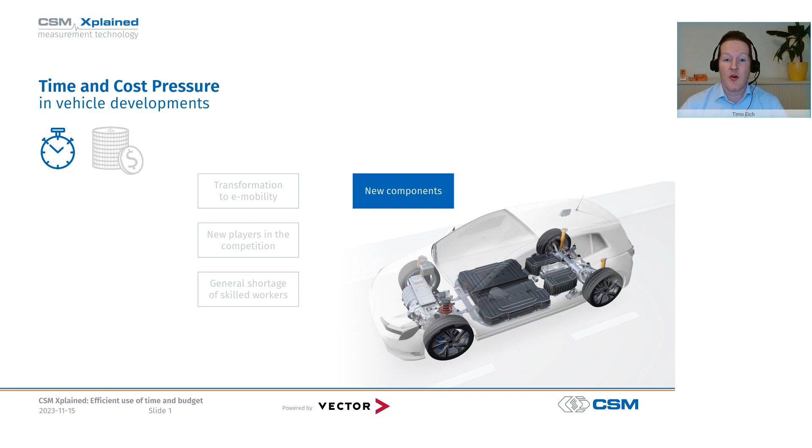Now, in the field of measurement technology, we are dealing with a whole range of relatively new components in electromobility for which not that much experience is there. And for some of these components, for example fuel cells and batteries, new technology knowledge is also required, for example from the field of chemistry, for which the relevant people in charge have to be trained first.

Another problem with new components and systems is that most of the simulations for those are still insufficient. Why is that? Because any simulation is only as good as the models on which they rely. However, for many new applications, there's simply a lack of real data from practice, and models based on purely theoretical considerations often do not withstand reality.

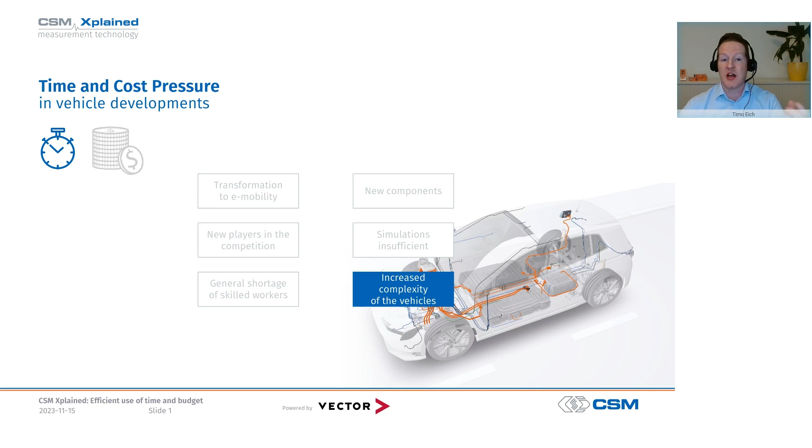This means that driving tests must be carried out already before the simulation starts in order to get valid data for the simulation models. In addition, the complexity of the vehicles has increased significantly, which naturally also leads to a much higher testing effort.

And what's more, oftentimes new measurement technology is required for testing new drive concepts, for example analyzers for electrical power, and in general, the need to safely acquire measured values of various sensor types at high voltage potential. This means new investments in new technology, measurement technology, hardware and software.

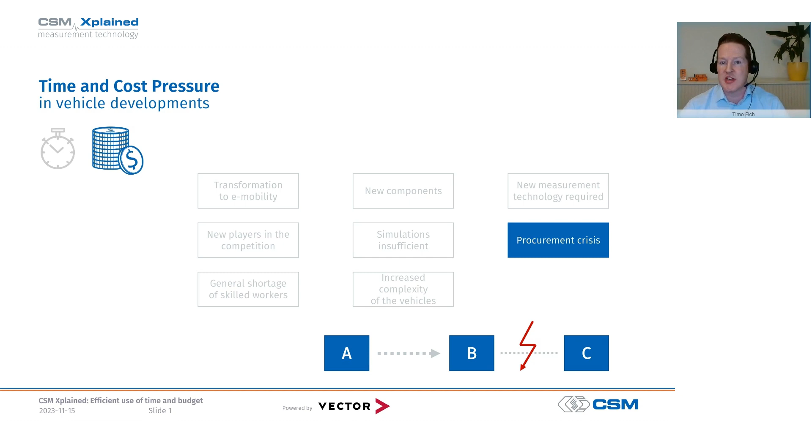And recently, we have also experienced direct cost drivers such as the procurement crisis, which has caused a massive rise of cost and delivery times, for example of electronic components. And finally, personnel and energy costs are rising everywhere, also due to the current inflation.

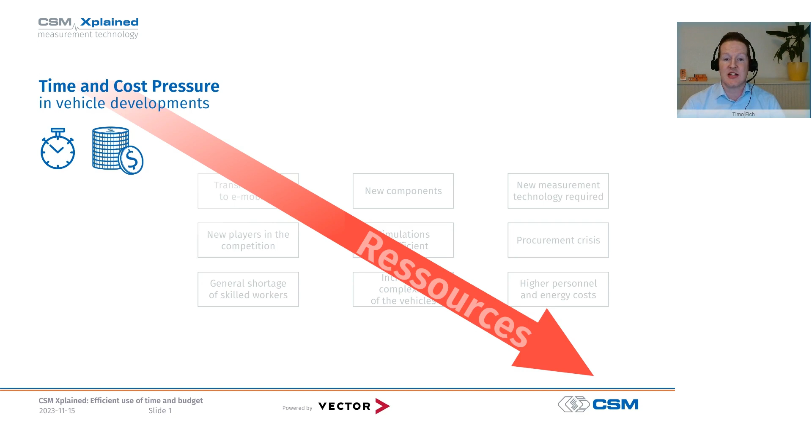Well, let's summarize the situation. Our resources, namely time and money, continue to decrease even though the complexity of vehicles and their testing continues to increase. So what does that mean? We need to be more efficient with our resources. We need to use the time available to us more efficiently, namely get more work done in the same amount of time. And we need to invest wisely so that our budget is used as efficiently as possible.

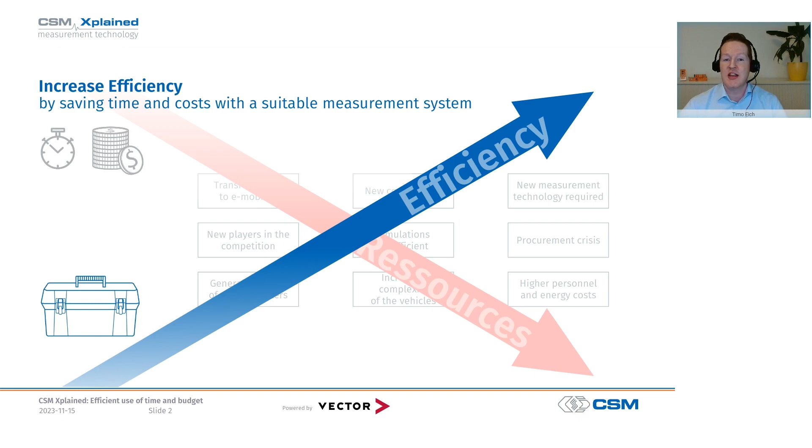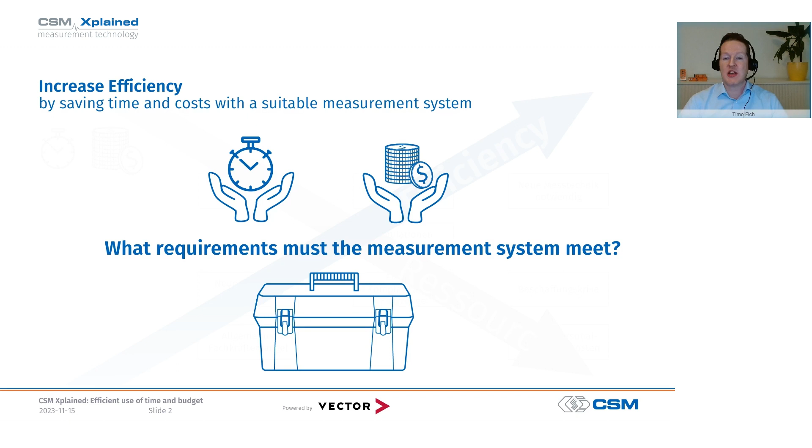And specifically in the context of measurement technology and testing, this means that we need measurement technology that is highly efficient, that makes work easier and is highly available, and measurement technology that is reliable and safe.

We will now develop together what this can look like using the usual measurement data processing procedure. We will briefly go through all the process steps along the way, reveal where time and cost traps may be lurking, and identify potential for optimization.

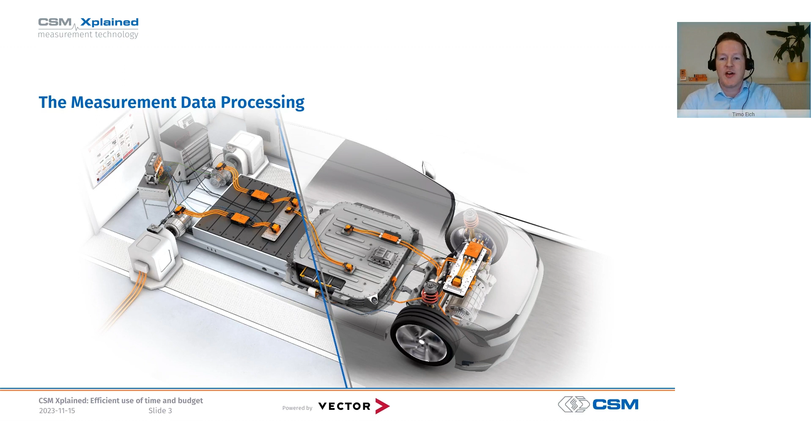So let's start by defining the scope of the investigation. This is where we can already set the course so effectively that we can benefit massively in the further process. If we decide now that not only one specific test will take place in our test vehicle, but that our test vehicle will be used for several tests at the same time, then we can save a lot of time by working in parallel.

Of course, we will need more measurement technology for that in our vehicle, and ideally we use a versatile measurement system that can carry out a wide range of tests simultaneously.

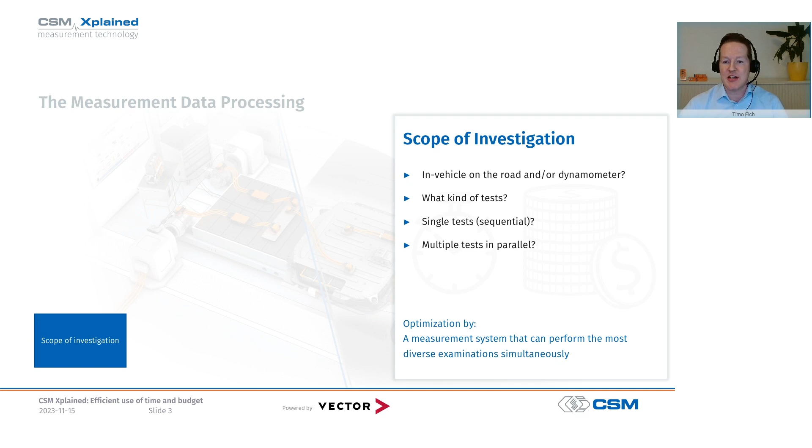Once we have determined the scope of the investigations, we must define which measured variables we want to record, and also determine the measuring points, meaning the locations and components at which measurements are to be taken. And we have to select suitable measuring principles and sensors.

And if we want to measure with many different sensors, it is very helpful if our measurement system offers the option of reading in a wide variety of sensor types, and that under harsh conditions if needed.

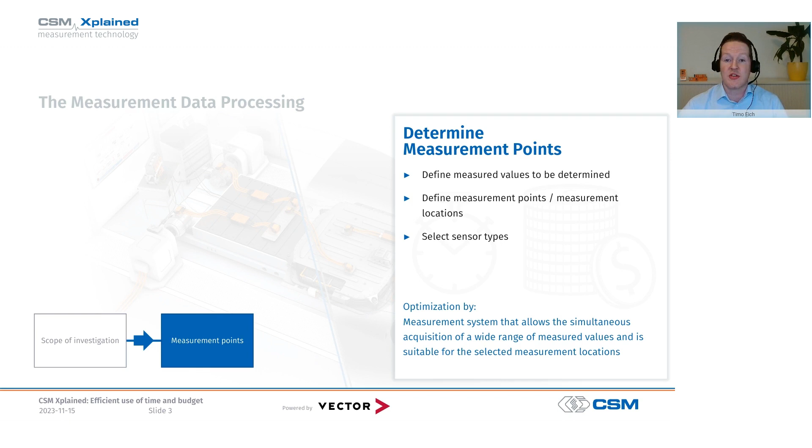Once the measuring points and sensors have been determined, we can then think about the choice of the measurement devices and modules. But what if we are lacking measurement equipment for new applications, let's say electrical power measurement? Then we have to think about it at the latest.

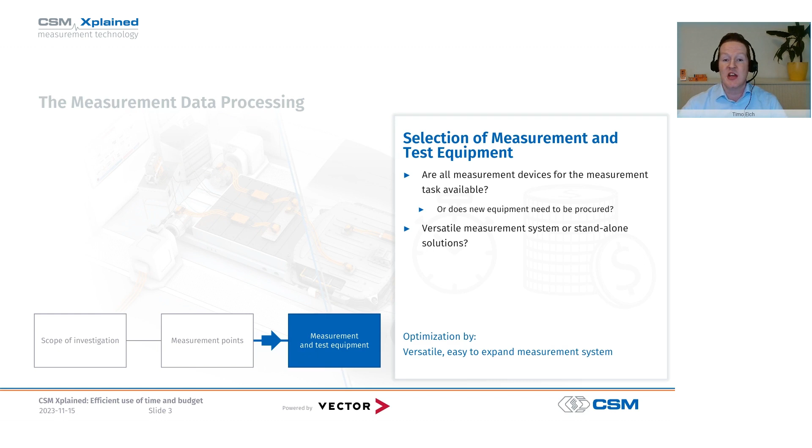Do we now buy a standalone solution, meaning something very special just for this measurement task? Or do we perhaps opt for a versatile, easily expandable overall solution that allows us to react flexibly to new requirements time and time again?

Because there's one important point, especially when it comes to time and money, that we must not underestimate, namely the effort involved in installing and configuring the measurement systems.

So how easy is it for us to have the hardware properly installed on the test bench, or even more difficult, in the vehicle? Ask someone in your company who's entrusted with the installation of measurement technology in the vehicle on a daily basis, if it's not you yourself, how much time consumption and stress can be avoided with good installation aids.

The user friendliness and simplicity of the software are also huge criteria for our customers. So is the software incredibly complex, and do we perhaps need new instructions or training after a 2-month break? Or is the software simple, self-explanatory, and offers configuration aids such as TEDS support, signal and sensor databases? A very important point in this consideration.

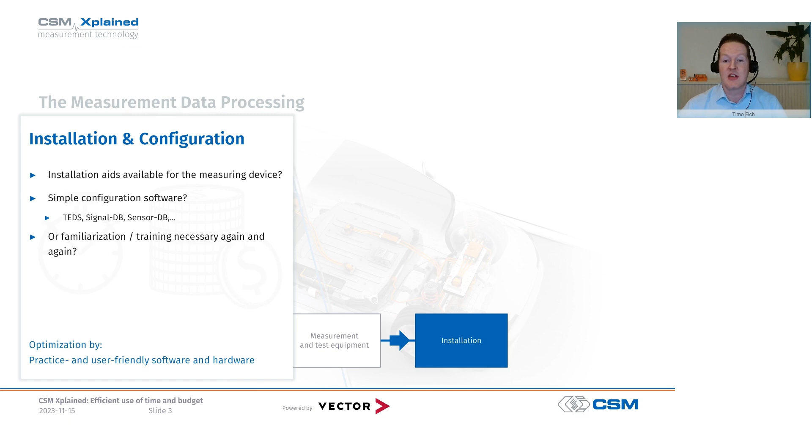Next step is the calibration of the measuring devices. Many of our customers have to calibrate their measuring devices before every test campaign. And it helps a lot if our measuring devices do not have to be sent to the manufacturer or a calibration service provider every time, but if we can at least partially calibrate them on site.

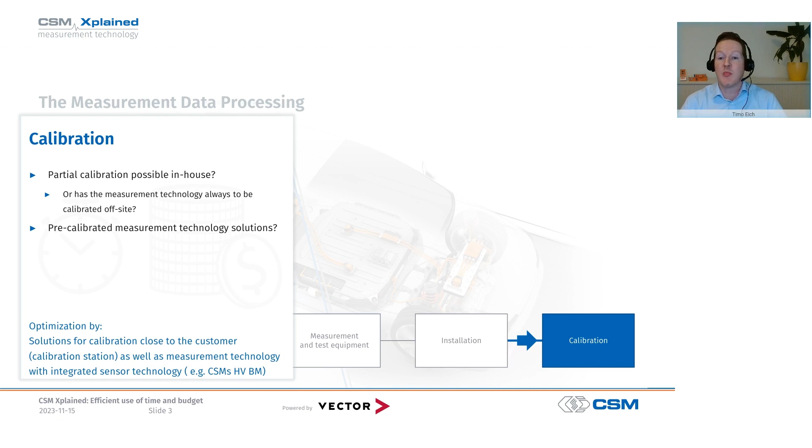Another point, for example, in electrical power measurement is, do the current transformers have to be laboriously calibrated on the test bench for days? Or can we save a lot of time with an intelligent concept such as the HV breakout module from CSM with integrated current sensors? Because here the calibration is already carried out in the factory and the measurement module is directly ready for immediate use.

When carrying out the tests, it of course depends very much on how we have defined the scope of the tests in the first step. But even if we have equipped our test vehicle for several tests, the question is still, do we have to carry out the tests one after another? Or can we actually carry out various tests really at the same time?

Because the latter not only saves us time, but also allows us to directly link the test results of several tests, for example acoustic data and electrical power data. And in this way, we can anticipate some of the offline data analysis and perhaps even react to results already during the tests.

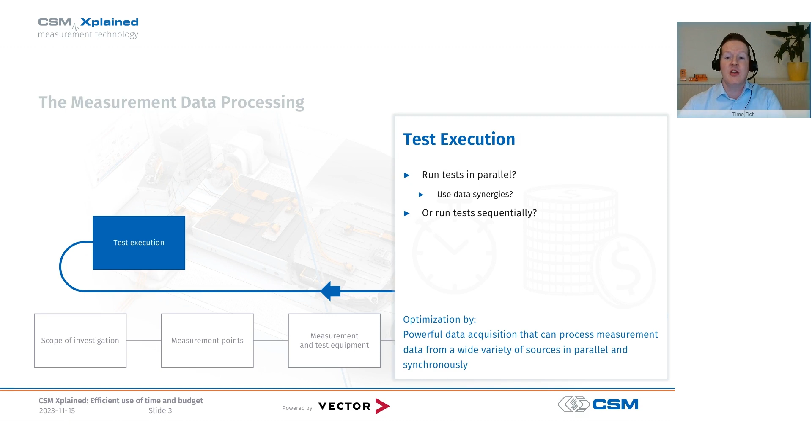Another very interesting way to increase efficiency is data pre-processing, meaning real-time calculations. Here, our suitable measuring system calculates meaningful parameters from raw data in real time during the data acquisition. For example, we could have our measuring system calculate the active, reactive, and apparent power on board from the raw current and voltage signals.

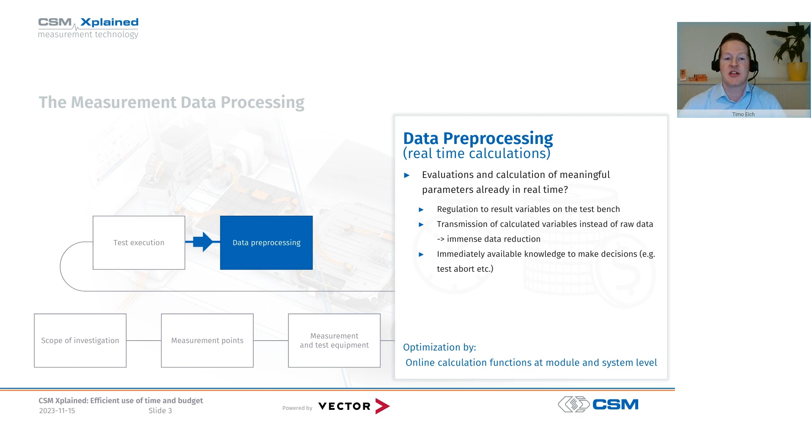With these calculated parameters, we then have completely new possibilities. For example, we can react directly to these calculated measured variables, or even use them as controller inputs on the test bench, or carry out a massive data reduction through the exclusive transmission of calculated values.

Provided we have decided to record several signal sources simultaneously, it is absolutely crucial that the measurement data is precisely synchronized with each other. However, it is often problematic, especially with standalone solutions that work each on their own, if the various data files and time bases then have to be laboriously synchronized manually. In practice, we can really lose a lot of time here.

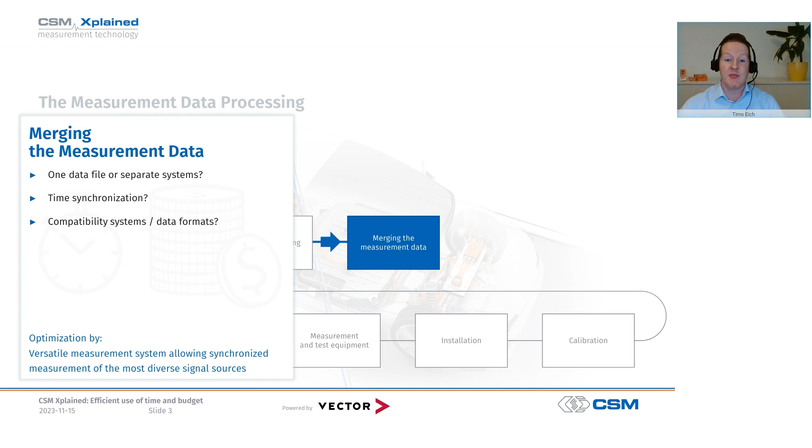But if our measurement system allows us to write the measurement data from all signal sources synchronized in a single data file with one time base, then of course the data is available for analysis immediately after the measurement.

Another way to increase efficiency is by means of intelligent data storage and, in driving tests, remote data transmission. When storing data, triggers can help us to only record what is relevant to us. Data compression can help save storage space, and if the data is saved in the correct target format straight away, there are no annoying waiting times for converting file formats afterwards.

And in road tests, remote data transmission to a server is a particularly good way of starting offline analysis in parallel while the road test is still running. To do this, we need a data acquisition system that allows smart data storage management and also has wireless communication tools on board for the road tests.

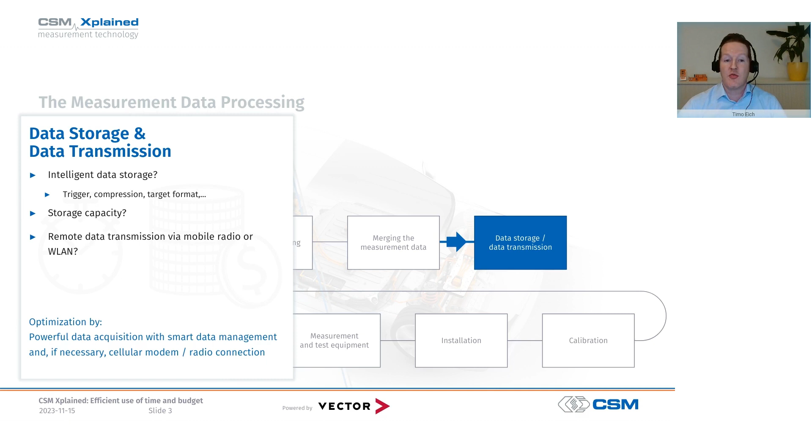And at some point, the data is transferred and saved, and then it's finally time for offline analysis. And here some exciting questions arise. Is the data from different signal sources already synchronized in time? And are all the data files in the same file format?

Of course, it's extremely helpful if the evaluation can be automated via scripts and if entire test series can be analyzed automatically in one go. Another aspect is the combined analysis of data from different simultaneous tests, such as the aforementioned correlation of acoustic data and power data. This requires powerful offline analysis tools with open interfaces and modular expandability.

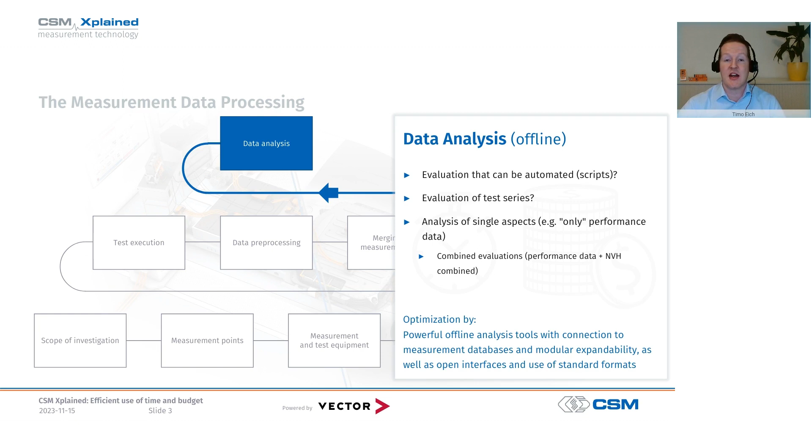And we need still something more for conveniently analyzing entire test series, namely intelligent data storage and smart measurement data management. The question here is, do we still store data in the traditional way in some file folders, or are we perhaps already using a measurement database with cloud connection and a wide range of analysis options? Here again, we can save huge amounts of time, especially with large test series.

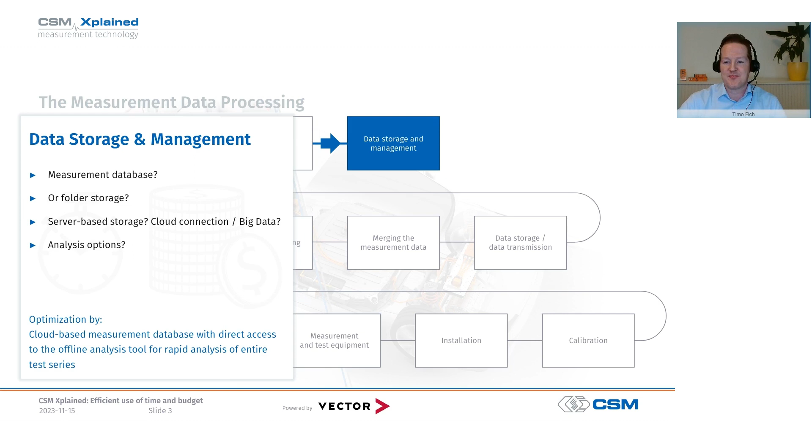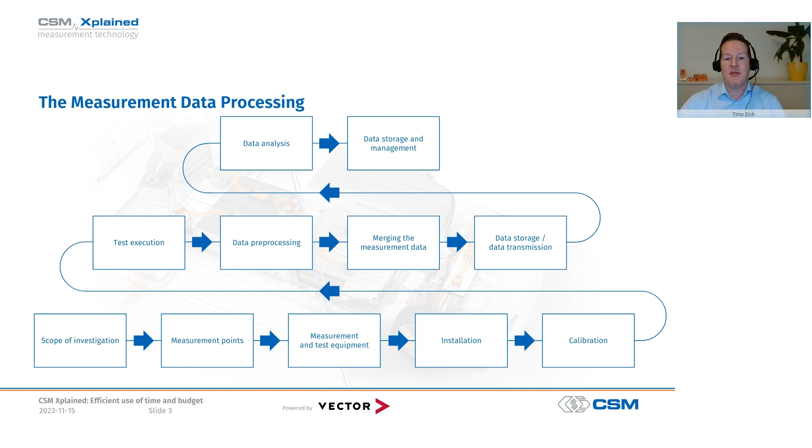Here is the entire measurement data processing procedure at a glance, and we have just talked a lot about the basic optimization potential of the individual process steps. The question that now arises is, how do we implement this potential in concrete terms? To answer that question, I would now like to introduce you to 4 key principles that we believe are crucial for significantly increasing and maximizing the efficiency of measurement data acquisition.

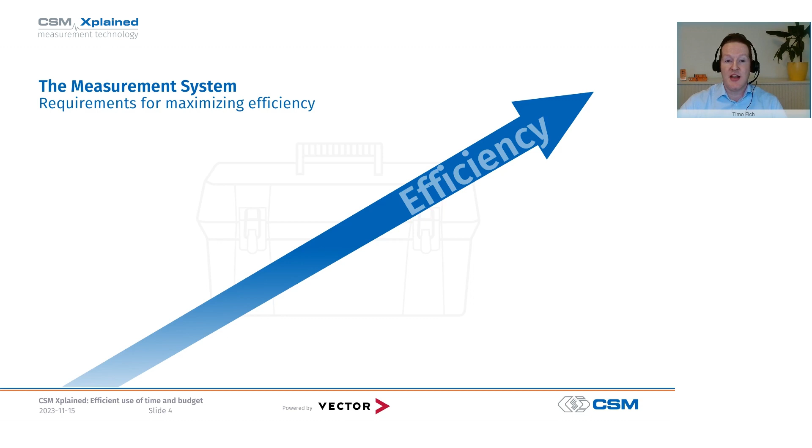And these 4 principles are: number 1, connectivity. By connectivity, we mean the use of powerful bus systems, interfaces, synchronization mechanisms, and file formats for easy connection of distributed measurement technology and its measurement data.

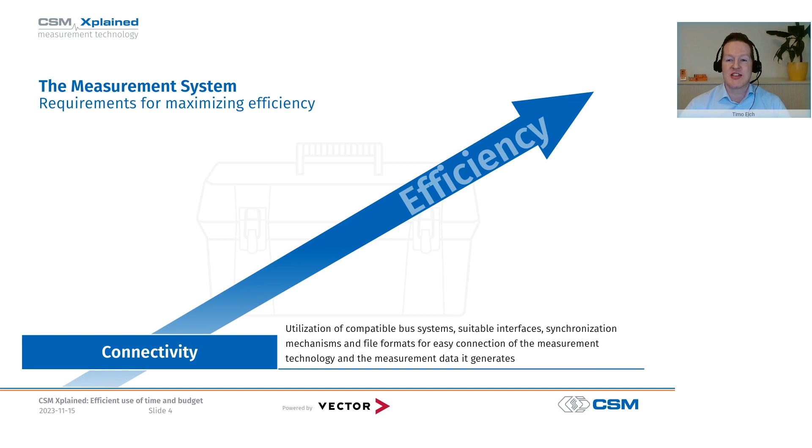And that brings us straight to the second principle, which is modularity. Modularity allows us to constantly reassemble a flexible measuring system consisting of specialized individual modules in such a way that it is precisely tailored to current requirements.

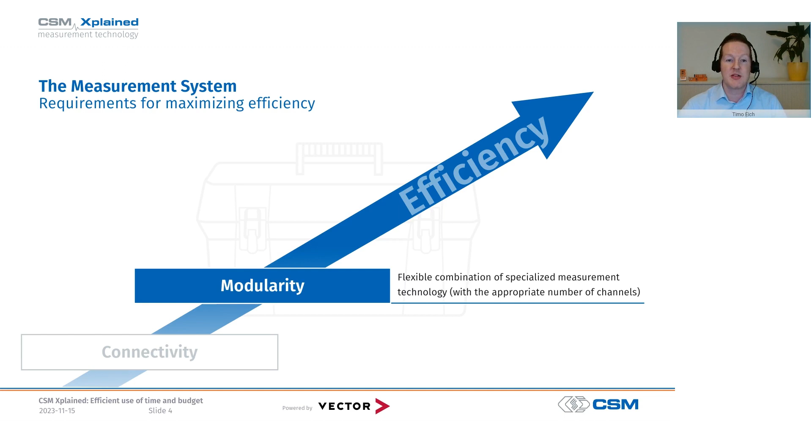And if we have powerful measurement modules and bus systems at our disposal, then this results in the third principle, and the third principle is scalability.

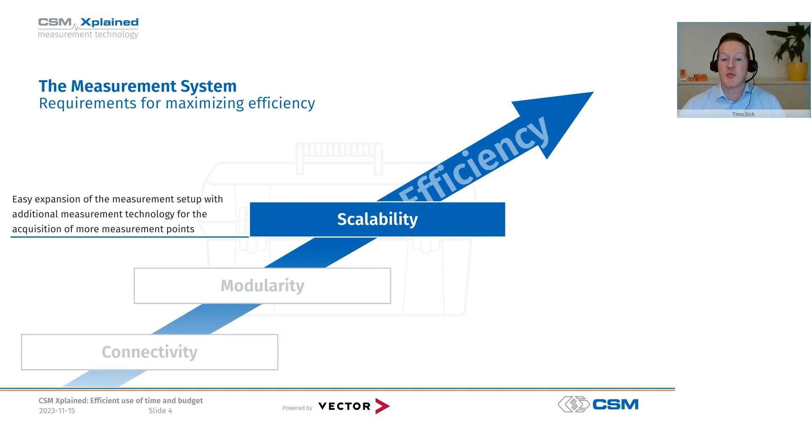Scalability means we can implement very small measurement setups and manage huge connected measurement setups with the same modular measurement technology. And if we combine our first three principles, it brings us to principle number four: versatility. By versatility, we simply mean the almost unlimited possibilities of acquiring data from a wide variety of signal sources and performing a wide range of analysis with a single system.

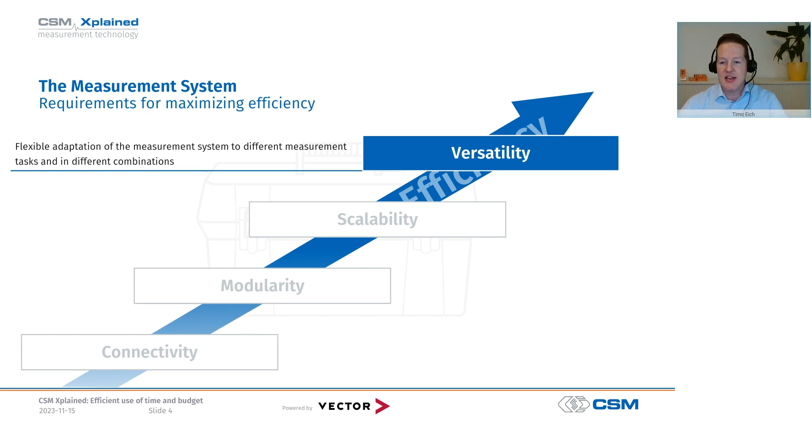A measurement system that combines these four principles, connectivity, modularity, scalability, and versatility, is the Vector CSM e-mobility measurement system. This system consists of a wide variety of modules that can be flexibly combined to meet changing or simultaneous requirements, from analog measurement hardware, bus data interfaces, and data loggers to measurement data acquisition software and measurement data analysis and data management tools. We won't look at all of these blocks today, but we will now explore the possible applications of the system using the four basic principles just presented and some practical examples.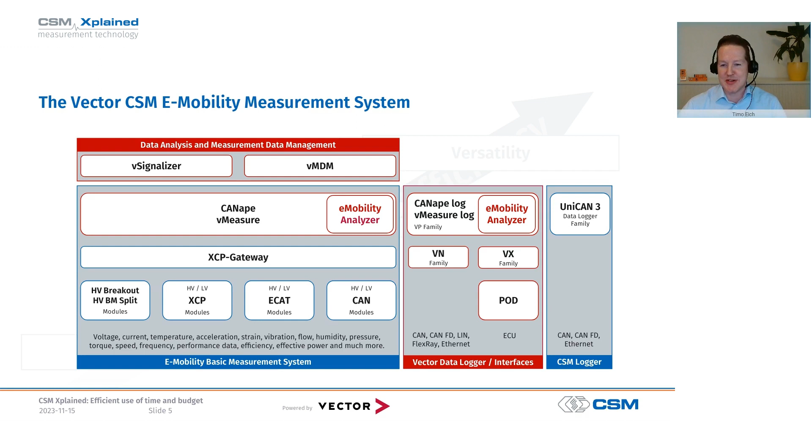Let's start with our first principle, connectivity. For us, connectivity means the use of compatible bus systems, interfaces, synchronization mechanisms, and file formats to connect different software and hardware modules together to form a system.

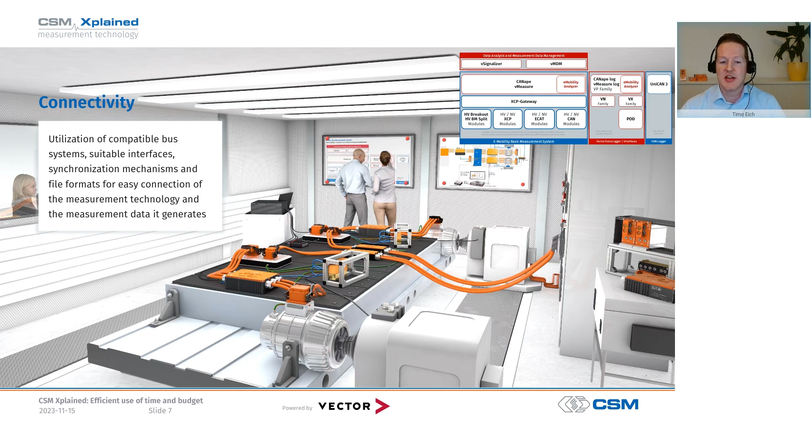Here's a small example: a power measurement on the electric drivetrain. In fact, we do even more here, because we measure the DC power between the battery and the inverter, and the mechanical output power on the electric motor via speed and torque, and determine the overall efficiency of the electric drivetrain, plus recording some temperatures on components that operate at high voltage level, such as the inverter or the electric motor.

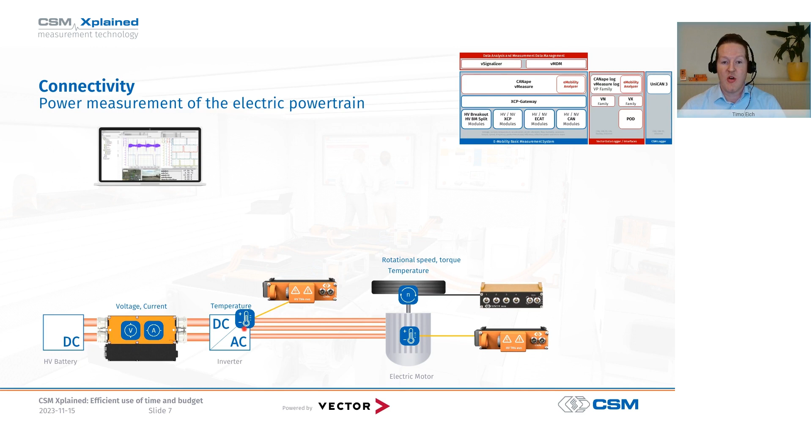If we take a look at how the measurement modules are connected with each other, we can see that various bus systems are in use here, which cover different requirements for the corresponding measurements. We can see devices connected via CAN bus here in blue, devices connected via EtherCAT here in green, and also an XCP on Ethernet connection here in black. Let's take a look at these three bus systems.

XCP on Ethernet is a high-speed interface that is widely used in the automotive world, especially for in-vehicle applications. At CSM, we use this very fast bus system primarily because it supports a standardized protocol for synchronizing many distributed bus participants, the so-called PTP, Precision Time Protocol. This protocol allows us to synchronize fast signal sources with microsecond precision.

The second bus system is EtherCAT, also a standard that is widely used in automation, particularly on test benches. At CSM, we use EtherCAT as a fast backbone for hundreds of measurement channels and for connecting our modules to test benches. EtherCAT also has a built-in synchronization mechanism, the so-called distributed clock. And for all slower variables, we use the good old CAN bus, which does not offer these high bandwidths, but it's very easy to use and it's incredibly widespread.

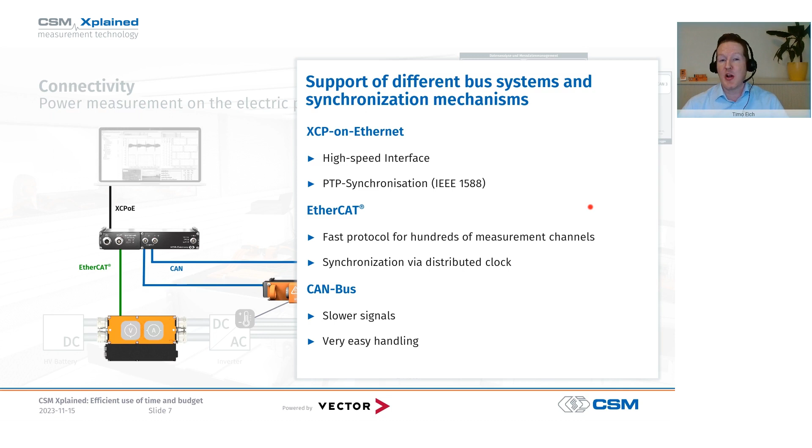With these three bus systems, we are now able to set up distributed, very fast, and synchronous measurement networks, which is what we mean by the principle of connectivity.

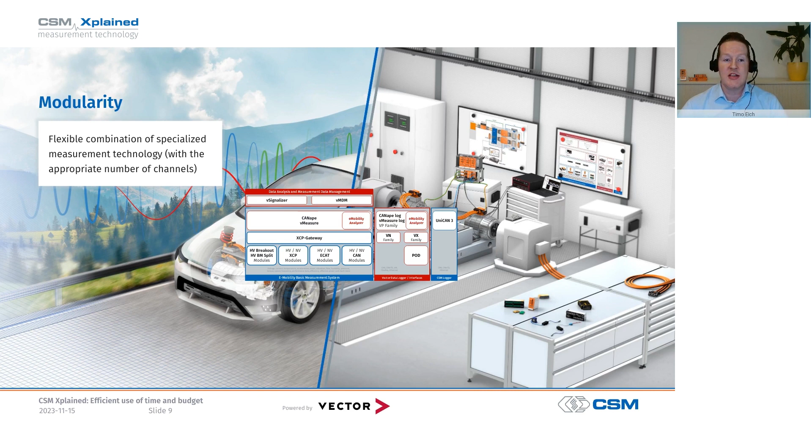That directly leads us to the second principle, modularity. Modularity means the flexible combination of specialized measurement modules in order to build systems that are precisely tailored to the application. Our goal is to cover a wide range of applications and scenarios.

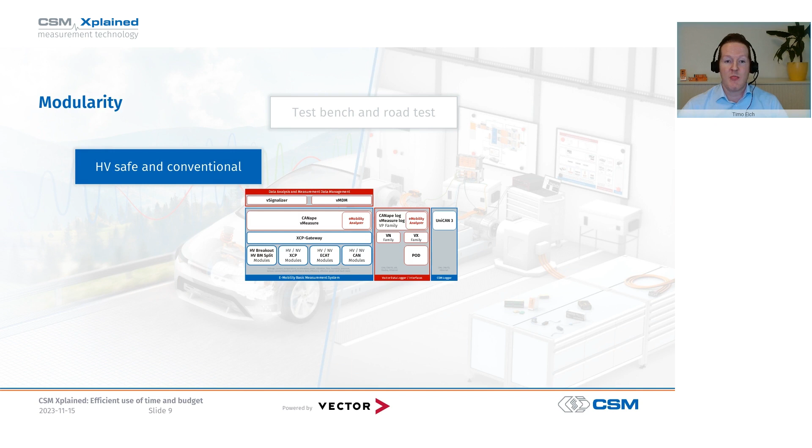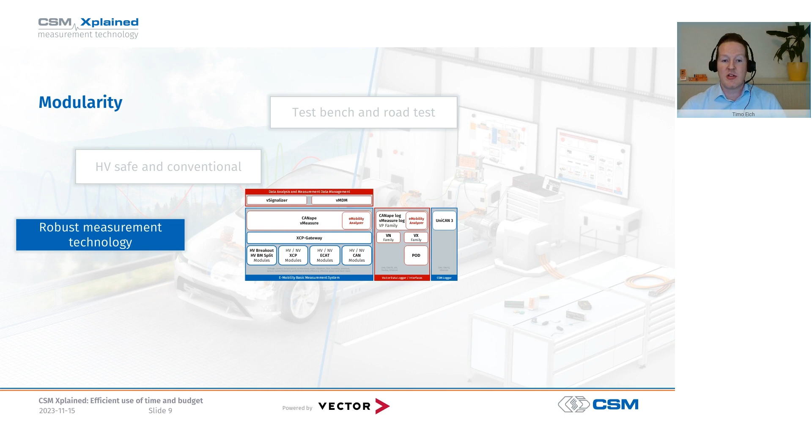For example, modules for test benches and road tests, modules for high voltage applications and modules for low voltage applications, robust modules suitable for both test benches and road tests, modules for different speed requirements, meaning different sampling rates, and of course measuring modules for various measured variables that can occur during different tests.

At CSM, for example, we offer a very broad and deep portfolio of measurement modules for analog sensors, which covers almost all application scenarios for a wide range of measured variables, for various speed requirements, and for low and high voltage applications. You may have already noticed that our measurement modules offer a rather small number of measurement channels, and that's for a really good reason.

This is because we only ever combine exactly the measurement channels that we really need into a system. We can then use the other measuring channels or modules that we also have at our disposal in other projects at the same time. In this way, our measuring channels are used optimally and efficiently, and this simply saves us money in practice compared to large multi-channel central devices where many measuring channels may be tied up unused in a single test.

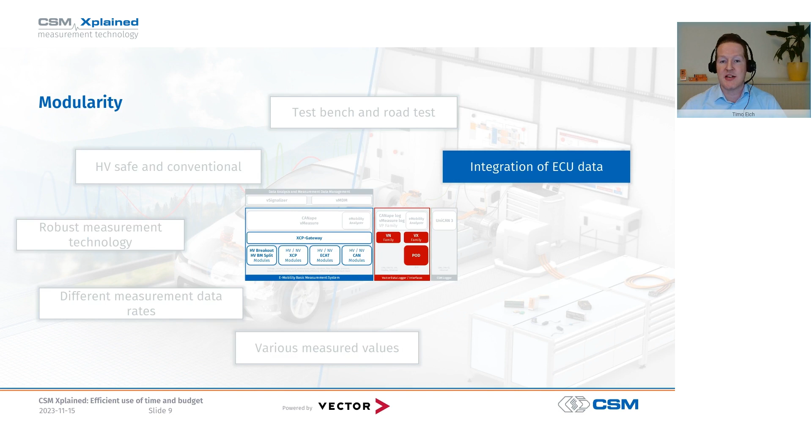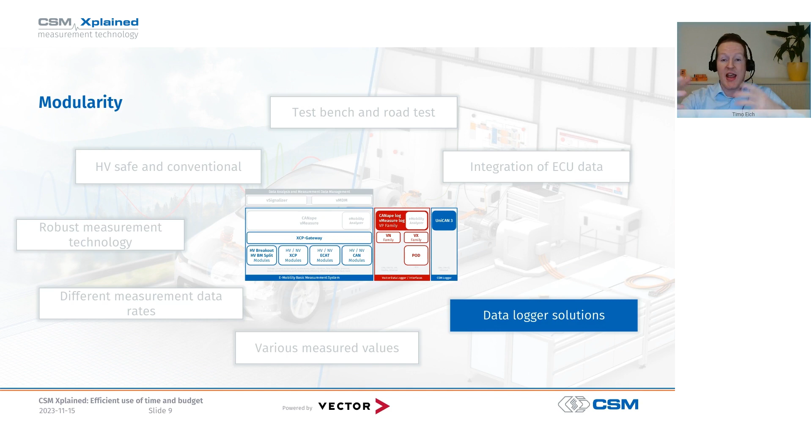These have been the measuring modules for analog sensors, and this portfolio is supplemented by the bus data interfaces of the VN and VX family from Vector Informatik, and our toolbox is completed by powerful fleet loggers and smart loggers from Vector and CSM for data acquisition in road tests. With this set of different modules, we can now set up distributed measurement networks in almost any combination.

Let's move on to our third principle, scalability. As a reminder, by this we mean the almost unlimited expandability and adaptability of a measuring system thanks to the modular and connected nature of the individual components.

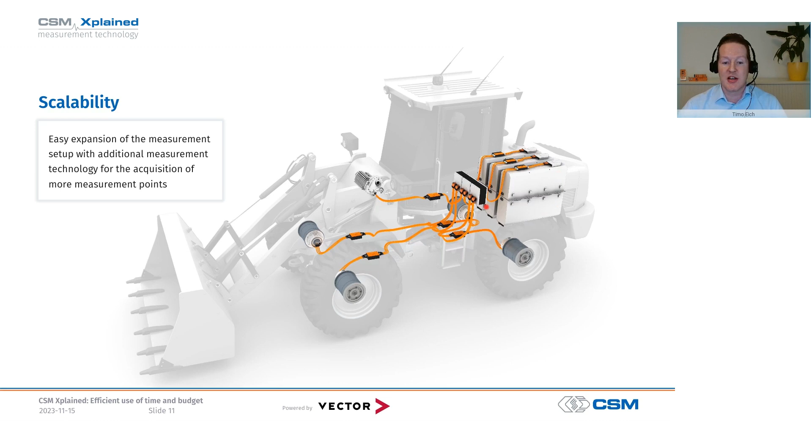Let's take a brief look at this using the example of an electric wheel loader whose four wheels are each driven separately by wheel hub motors. This is what the drive system of this electric wheel loader looks like. We have an HV battery that supplies all the components such as the heater, the cooling system, hydraulic pumps, and of course the four traction motors, each connected to the battery via its own inverter.

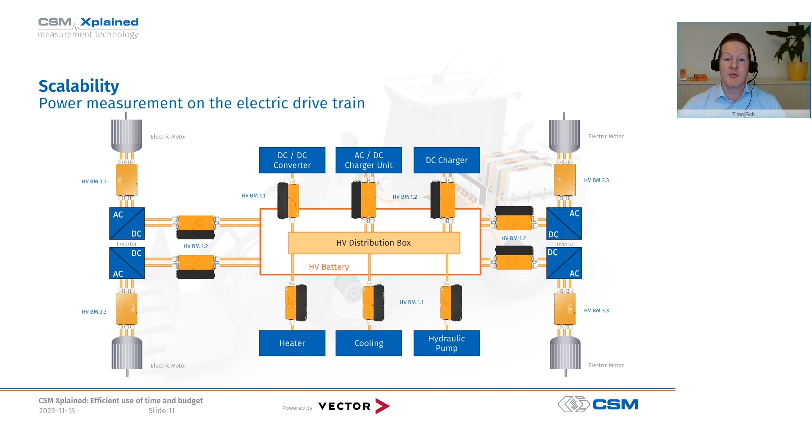If we now want to fully investigate such a drive, we will need measurement data from many points in this drivetrain. With our connected modular systems, we can scale our measurement setup to such an extent that we can collect measurement data from many measuring points simultaneously, quickly, and synchronously. This example illustrates the scalability principle of the Vector CSM e-mobility measurement systems very well.

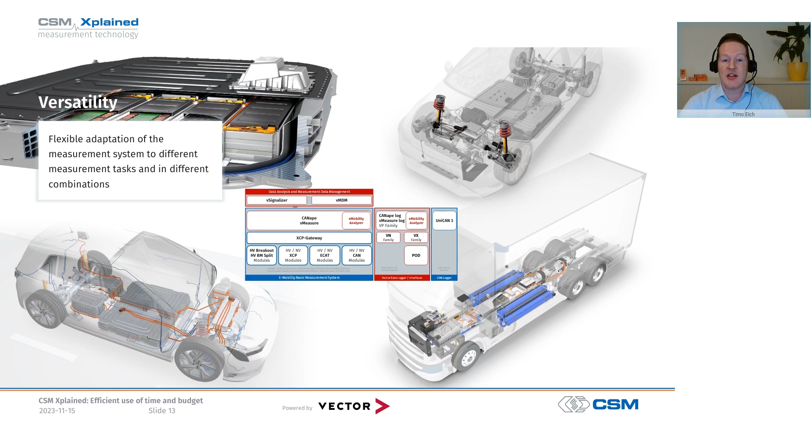That brings us to our fourth principle, and that's versatility. For us, versatility means that we can solve a wide variety of measurement tasks at the same time and collect and process the measurement data together.

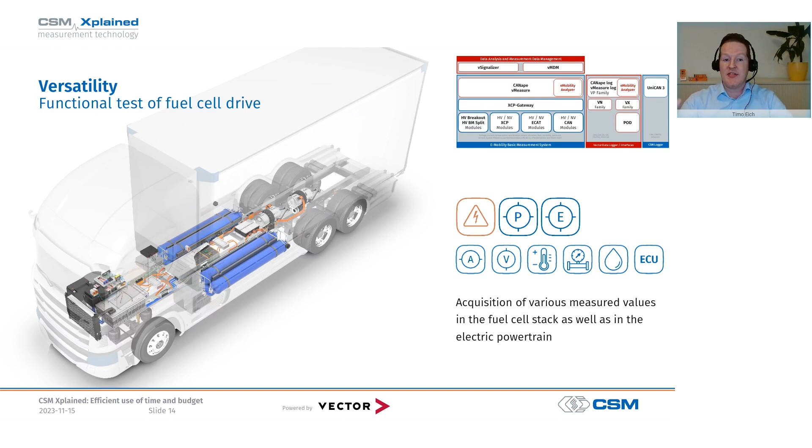Let's take a quick look at the functional test of a fuel cell drive, in which a wide range of measured variables must be recorded on both the fuel cell system and the electric drivetrain. This is what the measurement network for this functional test of the fuel cell drive looks like.

For your orientation, on the left-hand side in this light gray box is the fuel cell system with the fuel cell stack and the media supply. On the right-hand side is the drivetrain with the electric motor, inverter, traction battery, and so on. Everywhere on and between all of those components, a wide variety of data is now being collected.

For example, physical data such as temperatures, humidity, flow rates, and pressures in the media supply and cooling system of the fuel cell stack, which are transmitted via the CAN bus, the blue line here. Voltage and current values are measured in the high voltage path of the fuel cell system, which are transmitted via EtherCAT because they are simply much faster.

Power data is also collected from the drivetrain, which is also transmitted via EtherCAT, the green lines here and here. In addition, the fast information from the control units of many components is also read out with the help of Vector VX interfaces, and these are then transmitted via XCP on Ethernet, the black lines here.

Finally, with the help of our data concentrators, all the measurement data ends up in a data acquisition system via XCP on Ethernet, fully synchronized and in a single data file. As you have probably already noticed, this is not only a great example of the versatility principle, but also of the three other principles of connectivity, modularity, and scalability.

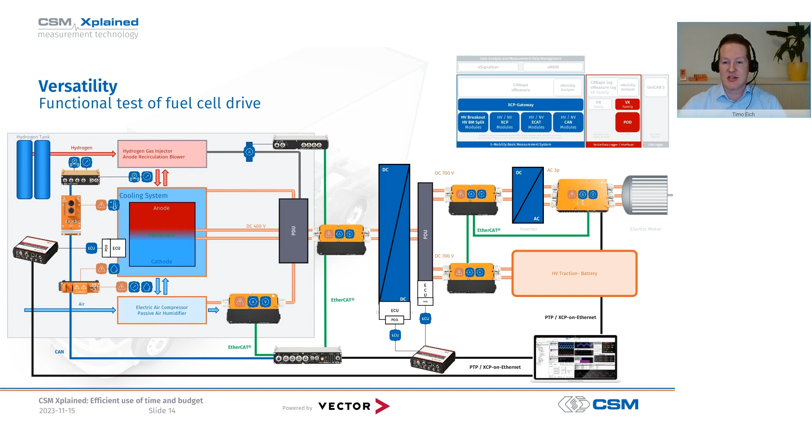A really good example of the performance of the Vector CSM e-mobility measurement system. To summarize, we can say that time and budget are increasingly scarce commodities, especially for measurement technology responsibles.

By consistently implementing the four key principles - connectivity, modularity, scalability, and versatility - we create the conditions to avoid the stumbling blocks in the measurement data processing procedure and can also leverage valuable optimization treasures. This enables us to use both time and budget as efficiently as possible.

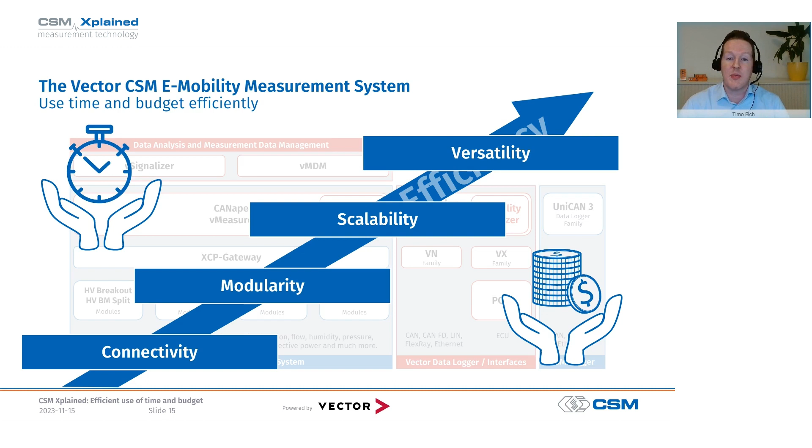And the Vector CSM e-mobility measurement system embodies these four key principles right from its basic idea, making it your loyal companion for implementing your measurement tasks in e-mobility.